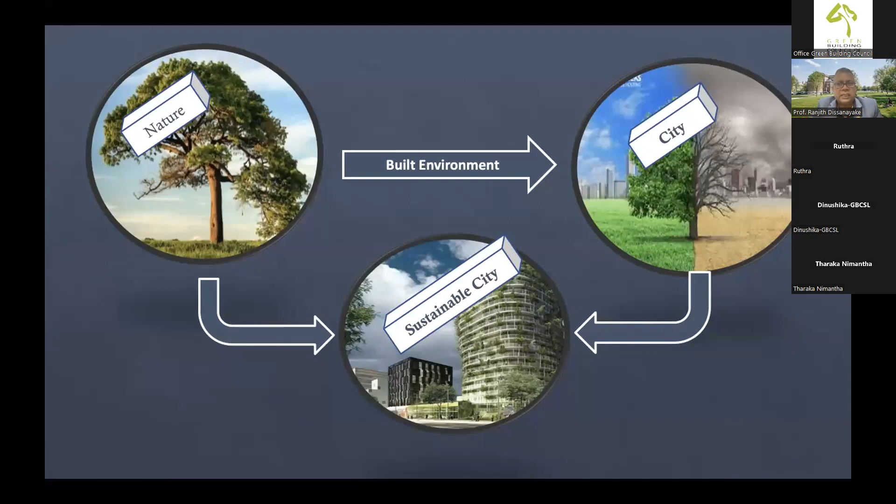Therefore, we build sustainable cities. What we do is again bring back daylight, rainwater harvesting, cross ventilation — I mean, you name everything that we had in nature, we are bringing it back. This is what we are basically trying to do in the Green Building Council of Sri Lanka. So, sustainable built environment: we create the built environment, we understand that we can't survive in the built environment as it is, so we are trying to bring the sustainable built environment.

Similarly, when you go to the economy, we again understand we have a big pressure in the economy. This is another pillar. So therefore, without having a sustainable economy, you can't survive.

We also have many things to get from nature, like renewable energy, clean water, clean air, and so forth. We can learn many things from nature in order to have a sustainable economy.

So now we have talked about the environment and economy. Next is society. People are not happy, they have a lot of issues. You might see on the street, people are not happy because they have so many issues. We have to make sure that we bring happiness to the society. So if you make sure that environment, economy, as well as social - when you bring these three pillars together, only then can you get total sustainability.

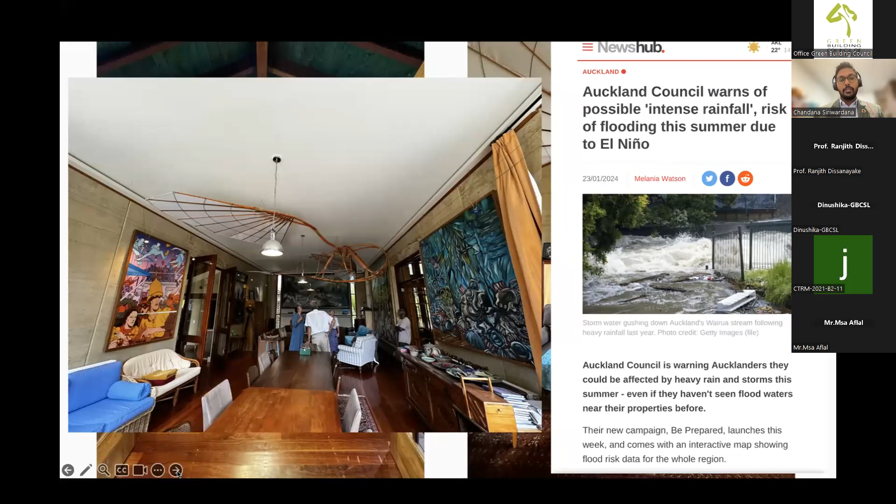Therefore, they are going to do many proactive measures, and develop interactive maps showing flood risk data for the whole region. So they are taking action, but the point is the weather is predominantly changing, and that is going to affect this very nice architectural and environmentally friendly sustainable building. Which makes me worried about that gentleman who is spending a lot of time developing this building.

Another thing is that you all probably know that last year was the recorded highest ever temperature recorded during the summer in Europe. And also these days, if you have friends over in Canada, you've probably seen a lot of cold weather and colder periods, and that is also extreme. So we see the two extremes, right? Back in the days when we were worried about COVID, we thought okay, COVID is the main issue we are having, and then we thought when we can overcome this, because we lived happily before COVID.

We never thought there would be a recession so soon after COVID. Not only in Sri Lanka, people might think recession is only happening here, but it's not. Around the world there are economic downturns happening, and it is real. Back in the day we thought climate change wasn't going to happen, but now we're not giving much attention to it, and it's going to be very real very soon.

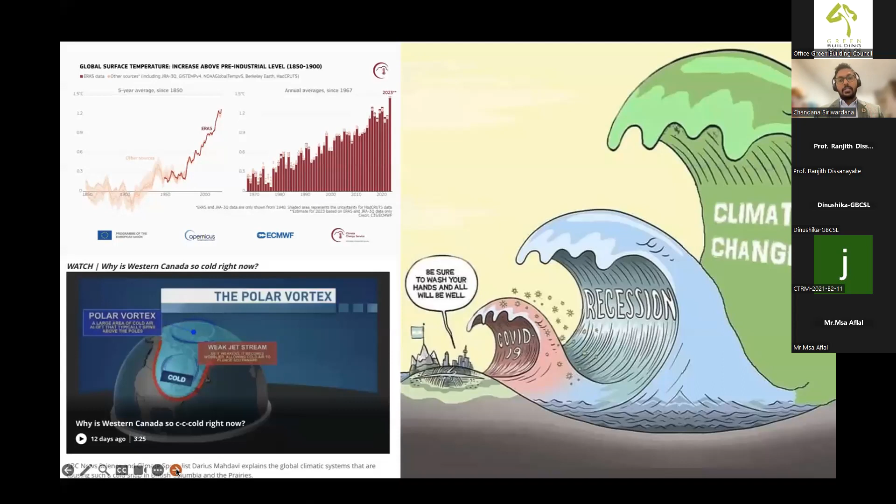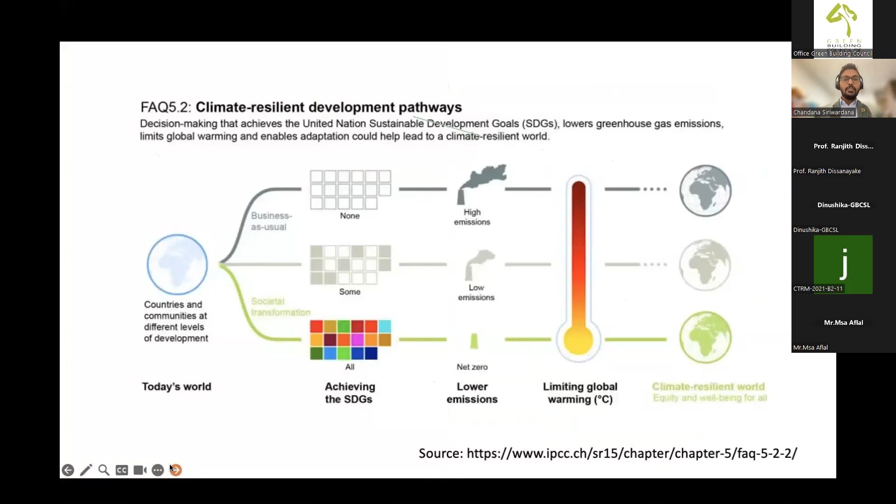Now, as you can understand, on one hand we have sustainable development as a target, and on the other hand we need to achieve disaster resilience, resilience to disaster as well as sustainable development. The triple bottom line of sustainable development was introduced by Professor Ranjith, and I'm not going to explain it further because he explained it very well. Disaster resilience, we'll look into more deeply down in the presentation.

Mainly, the three things we want to focus on in developing disaster resilience are: we want to reduce the chances of shocks. Shocks are sudden impacts which can happen naturally or be man-made. Then we want to absorb the shocks if they occur, and recover quickly after a shock.

In fact, some people get confused about the relationship between sustainable development and disaster resilience. In the literature—if someone is moving the cursor, could you please stop that?

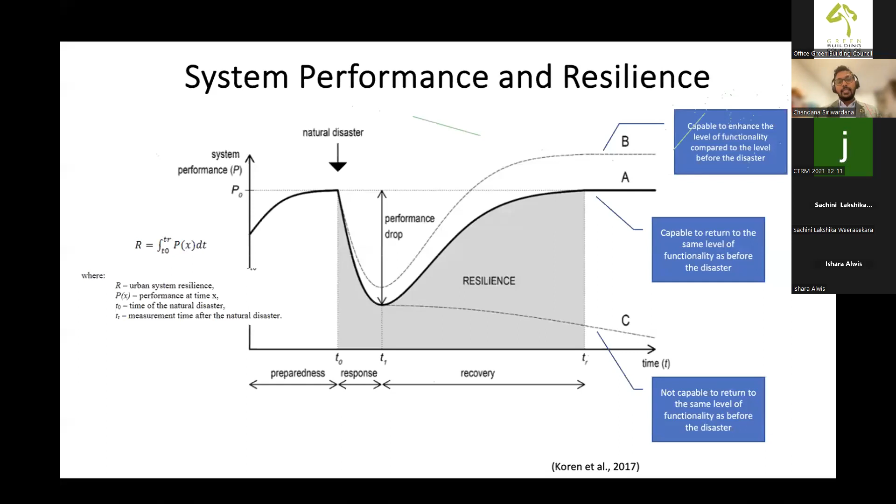So whenever there is another undesirable natural event which makes the performance drop, it will again come back, or it will not make the same amount of drop as the next time.

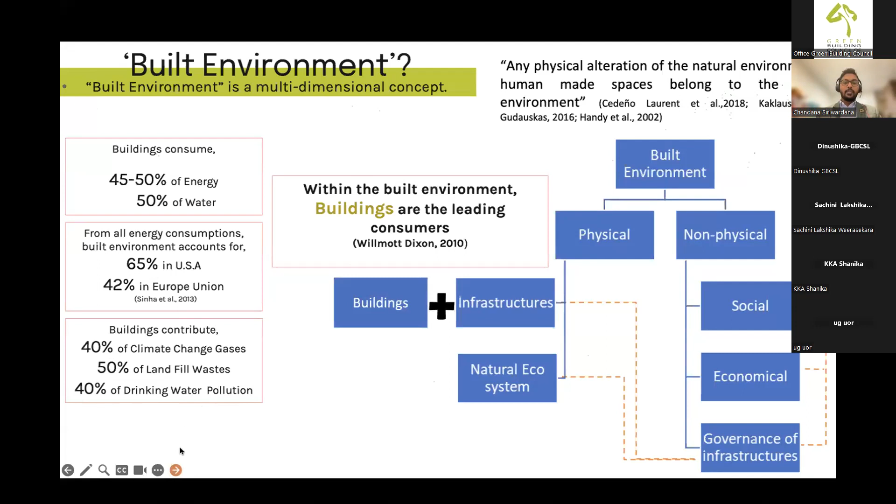Now connecting that to sustainable development goals, we all know sustainable means meeting our needs without compromising the ability of future generations to meet their own needs. If we build a building today, we make decisions mostly for today's context, but the consequences of that building will have to be faced by future generations. The building is going to last for around 50 to 70 years.

So this building is a livable addition to the built environment. So then we have to be very careful about the decisions we are making, as mentioned in resilient sustainable development, if you want to achieve that. In the sustainable development goals, in the built environment context, 9 and 11 are most important. 9 is about industry, innovation, and infrastructure. 11 is sustainable cities and communities.

As mentioned previously, green buildings is a very important concept and movement where green buildings try to overcome these adverse issues. Communities have fundamentally changed their environment and adapted towards sustainability by creating healthy, most importantly healthy, productive spaces. The people living inside have to be productive and energy conscious. This building has to be energy conscious and capable of reducing significant adverse impacts to the global environment and human lives. That is where green buildings are going to be a great solution, and definitely it is not only in Sri Lanka, but throughout the world.

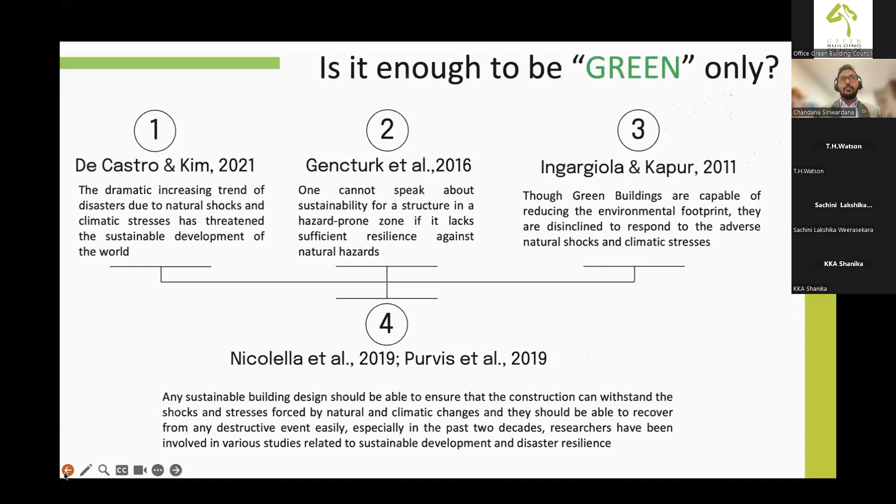It says green buildings are capable of reducing environmental footprint, are disinclined to respond to adverse natural shocks and climate stresses. Now, all these researchers are highlighting the missing link, the importance of linking disaster resilience to green buildings, because in green buildings the focus is mainly on sustainable aspects. Of course, there are some resilient measures, but I will come to that later.

In green building rating tools, to ensure minimum construction standards and practices in sustainable development, green building rating tools provide major guidelines and specifications. GBRTs are instrumental in educating users, incorporating sustainable strategies into planning, design, and construction. However, there is a considerable gap in the potential of existing green building rating tools to incorporate hazard resistance and mitigation into the broader context of sustainable development.

For example, even frameworks like LEED or BREEAM - LEED is US based and BREEAM is UK based rating tools - are not including hazard resilience indicators, as some researchers have highlighted. Therefore, it is essential to integrate certain resilient indicators to a certain level into green building rating tools.

Now there is a problem when you try to integrate these two, because when you try to make a structure - I think Professor Priyan and Professor Ranjit are experts in these areas, so I will let them talk about this in detail - but I will touch on the surface of this.

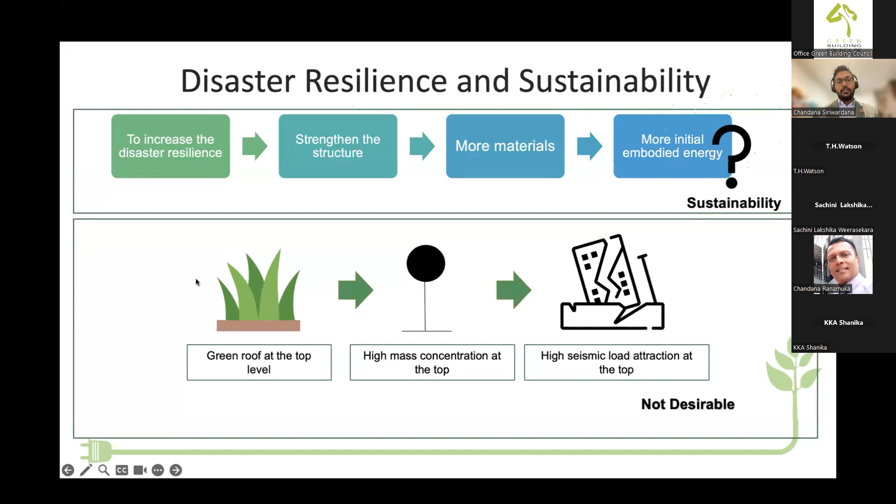So then there are contradictions when we try to merge these two concepts. Now, for example, if I take some examples from the literature, the importance of sustainability and hazard resistance. The other complexity of this issue is that we have many hazards, not only one: fire, earthquake, wind, flood, landslide, right?

So depending on the context, depending on the local hazard landscape, the measures that we have to take are different. So then the designs that we do to the buildings - we want to make them sustainable, and if we are trying to make them disaster resilient as well, sometimes they might not support each other. Now, for example, let's take lighting system, site...

For example, structural durability can be good for sustainability, but it might not be desirable for fire.

So the HVAC systems - sometimes it can be desirable for sustainability, but it might not be desirable for seismic or wind or floods, right? So then different design considerations are good for sustainability, but sometimes it might not be good for fire or seismic or other hazard resistance.

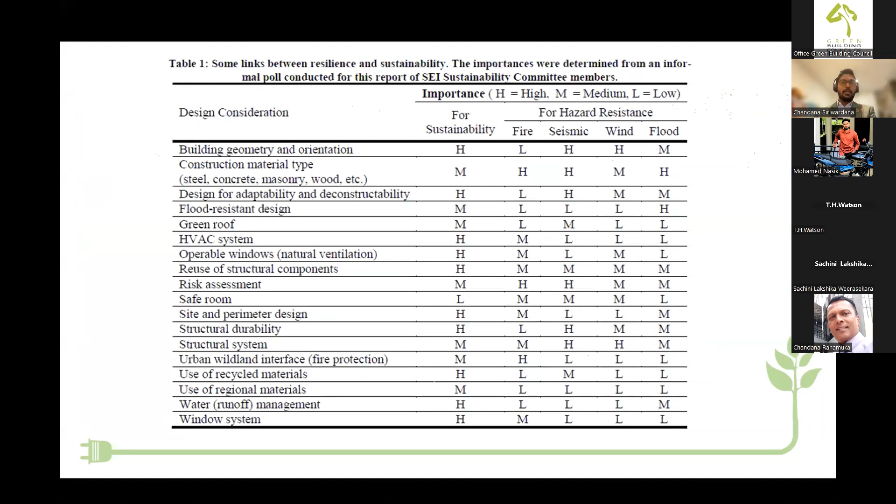I'm not going into details of it, but if you look at where green building ratings are at, it is at the planning stage or the initiation stage. So then what kind of rating tool, what rating range we are targeting, and what are the building codes and regulations - when you are doing the site selection, that is part of what will be assessed from the rating tools.

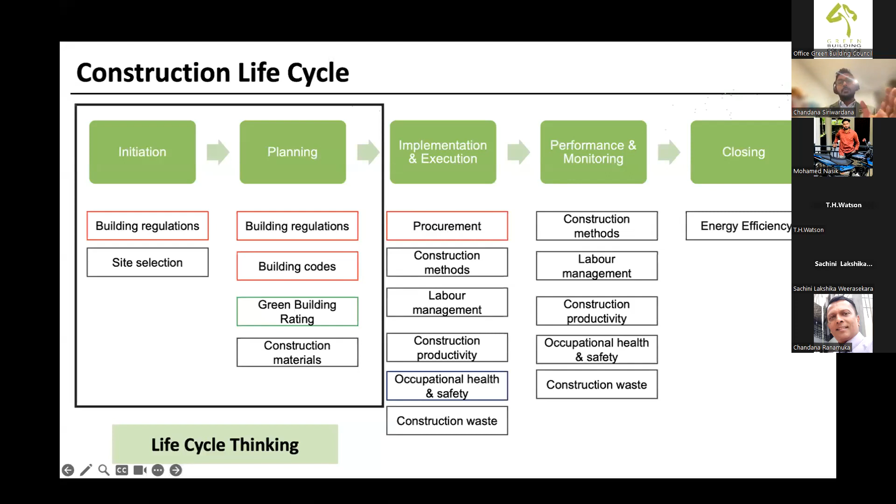So we need to think holistically rather than just go for conventional design practices. Again, I am giving some examples. So not only - as I said, a building is going to last for at least two, three, four decades.

So not only at the initial stages, but at the operational stages, what will happen to this building? What kind of hazards are going to be predominant in this area in the future?

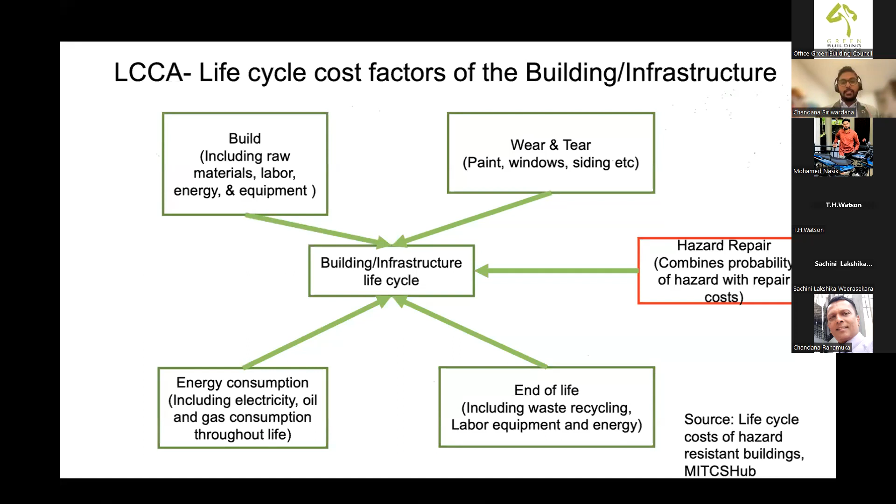What kind of risk is this area going to face? Likewise, what kind of repairs can we do? The most sustainable building is the existing building rather than the new building. So if you are going to demolish one building and develop another, that is not sustainable.

To understand the core elements of disaster resilience, we need to understand the context: whose resilience is being built, what kind of shocks and stresses we are aiming to address, what kind of capacity we want to improve, and what kind of range of responses.

So some resilience indicators that we want to focus on, sometimes these resilience indicators which we want to integrate into our green rating tools or sustainable assessment frameworks might be enhancing the sustainability. For example, checking and increasing the resilience of a brownfield area increases sustainability. But installation of lightning protection can decrease sustainability because you are adding more materials. So we have to be very careful in integrating resilience indicators into rating tools.

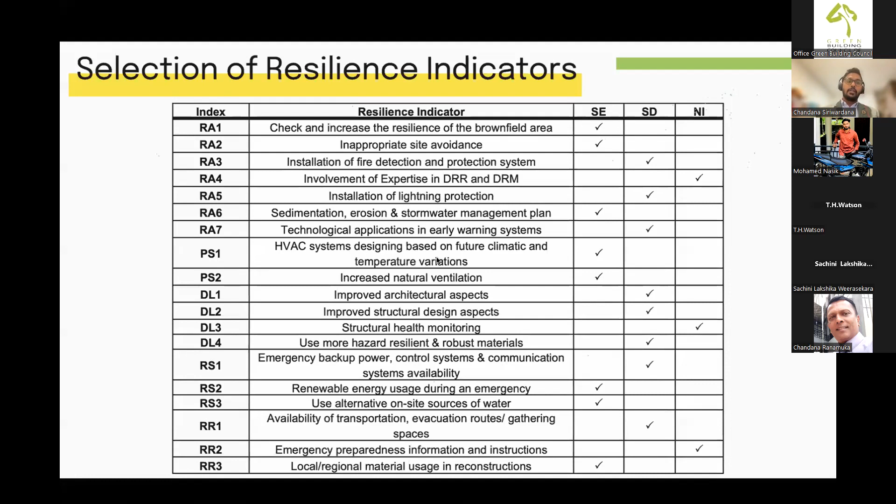Now let me show you quickly a study we did together with Professor Ranjith Dissanayake and some other researchers, which has already been published, on the importance of integrating disaster risk reduction into existing rating tools.

This is the same green rating tool developed by the Green Building Council. We wanted to test if we integrate disaster resilience into this green rating tool, adding several resilience indicators, and call it the new DRR incorporated tool. I don't think it is published and practiced yet, but the great thing is they tried it. It will be published down the road.

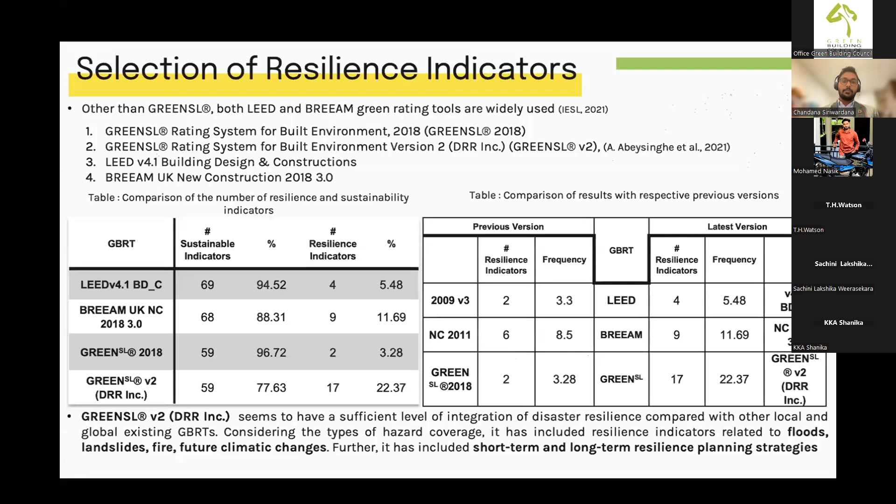In concluding my talk, I would like to highlight that it is very important to integrate disaster resilience into green building assessing frameworks, and it can be done, but it has to be holistic. We need to look at it not in isolation, but with proper support from all stakeholders, and there are other tools - we can keep the green rating tools as they are and develop a separate set of tools for disaster assessment. For example, the RELi framework, a US-based framework purely to assess disaster resilience, or FEMA, again US, to assess the resilience of buildings. Finally, it is very important to systematically approach these issues, looking at the entire life cycle of the building rather than one aspect in isolation. Thank you very much.

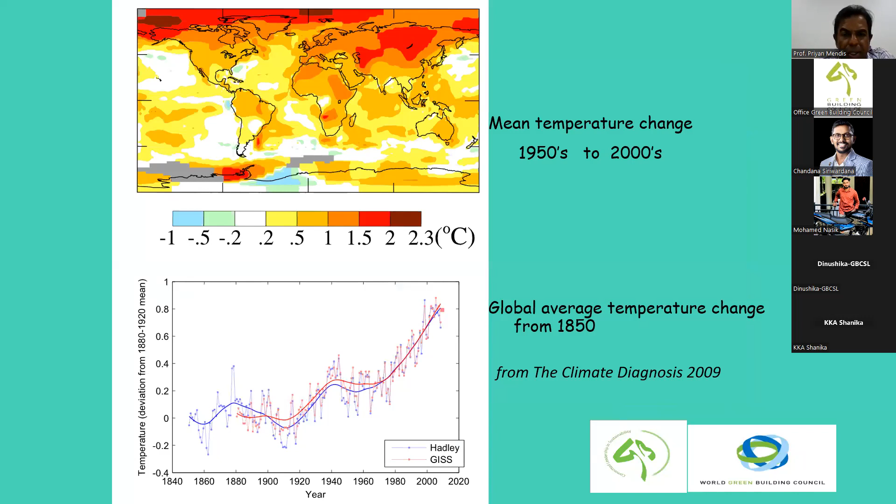This is also very clear: temperatures are rising. I'll go quickly. This is real data from the 1880s showing how temperatures have risen over the years. I'll go directly to the 1940s - when you graph it like that, you can clearly see it is happening. So we have to do something. As Dr. Chandana mentioned, our target is 1.5 degrees by 2050 to limit it, but it's going to be 2 degrees anyway. This is 2022.

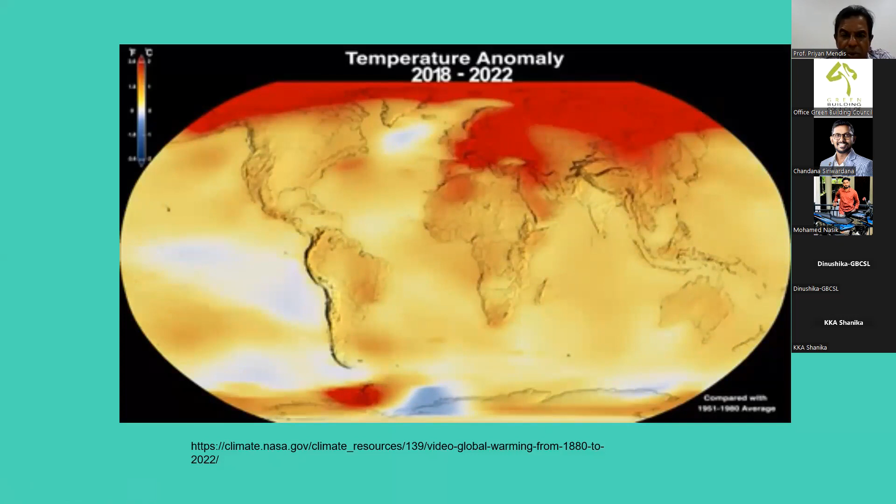It's really happening. As the book I've mentioned before, by Mark Lynas, says, 6 degrees would mean humanity would really be in danger of even vanishing at very high levels. So we have to do something - disasters are going to come. Closer to Sri Lanka, we know droughts have happened in unusual ways.

I was there a few weeks back and it was raining and floods occurred. It's unusual - the climate is changing. Everyone now believes that, with floods and droughts at different, unusual times, and landslips. Disasters are everywhere. So I'll go very quickly and not go through all the slides, as I want at least 10-15 minutes for Q&A.

Sustainability and disaster resilience, as we discussed today, really have to go hand in hand. You can't separate them - that's why these green ratings need the DRR included. As Professor Ranjit and Dr. Chandana explained, why they had to be linked and really included.

Green building is happening everywhere. Every building's architect is considering the green aspects. Twenty years back, if we saw a building like that somewhere in the world, people would think something was wrong with the architect, putting plants and making it ugly. But that's totally different now - everyone likes it and wants to see the green. The world has moved forward a lot.

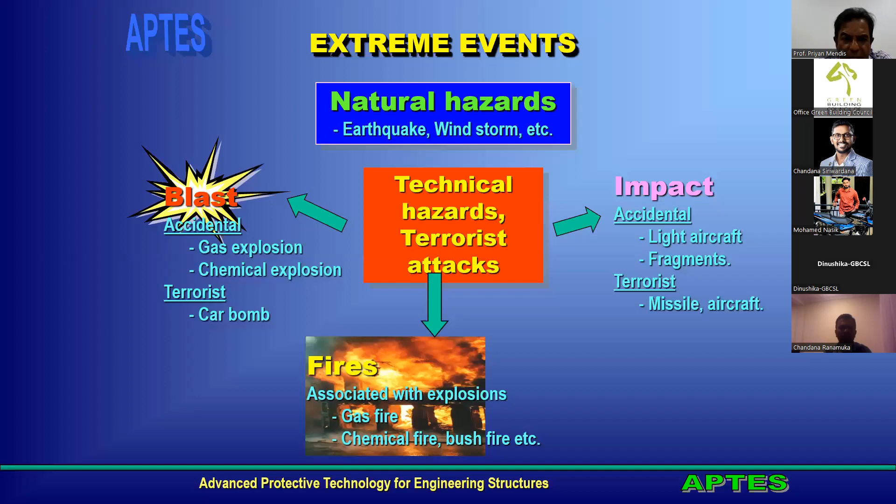So if you start incorporating them when you design a building, you do a risk study, you do a vulnerability assessment - what are really the consequences, what happens if any disaster strikes. Then we have to start coming up with protective solutions, and then optimization - we have to do this optimization.

Today I don't have much time to talk about optimization, but you need to think about reducing materials. We are going for waste materials, sustainable materials in construction, but we need to think about optimizing the elements, bringing in sustainability aspects, and in this case, vulnerability means we need to consider disasters as well in terms of striking a building.

So coming back a little bit, very quick photo details rather than going through everything in detail - fire is the main one which really affects how we can design a green building. What happens if a fire strikes?

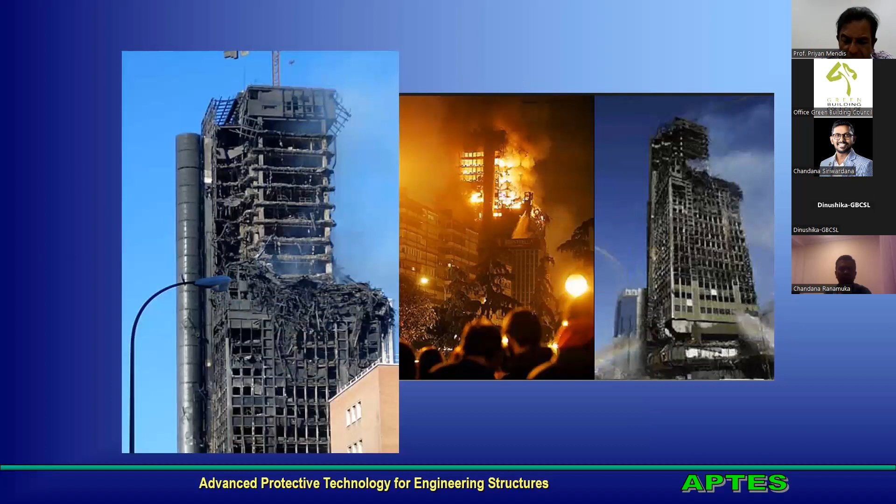Fire is there, then we could have really had to think about. This one here is what you see in the slide is where one of the worst fire disasters started. That is the cladding of the buildings around the world. There's aluminum composite panels - also in between the two aluminum panels there's a polyethylene, PE core.

Why the world went for the PE core and this sort of aluminum composite panels is mainly for energy conservation, because sustainable buildings came. So architects and builders thought, let's look at one which is really aluminum, looks very nice from outside, and has a polyethylene core, which is really for energy conservation within the building.

That led to this disaster. This is a very good example of why we go green, but don't really consider the disasters. So the polyethylene in between the aluminum core just caught fire. You have seen some of my talks in this area - it's a big problem everywhere in the world.

It started with one of the Lacrosse fires in Australia, to the Grenfell Tower fire, which changed the world with these cladding fires. So ACP is a big disaster. Newer buildings will not have that problem, but many old buildings around the world have that problem. In Australia we have retrofitted some buildings, but still around the world there are many.

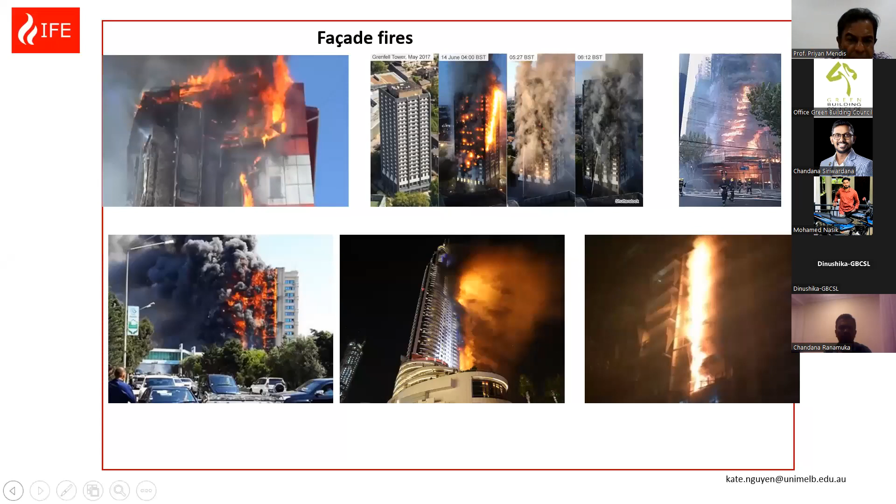Anyway, I'll leave that to another day. So this is how sustainability, if you're not careful with consequences under disasters, could lead to some other very serious consequences, as happened over so many years. Grenfell Tower lost 70-odd lives. So this is why I think including disasters in this thinking is a very good thing.

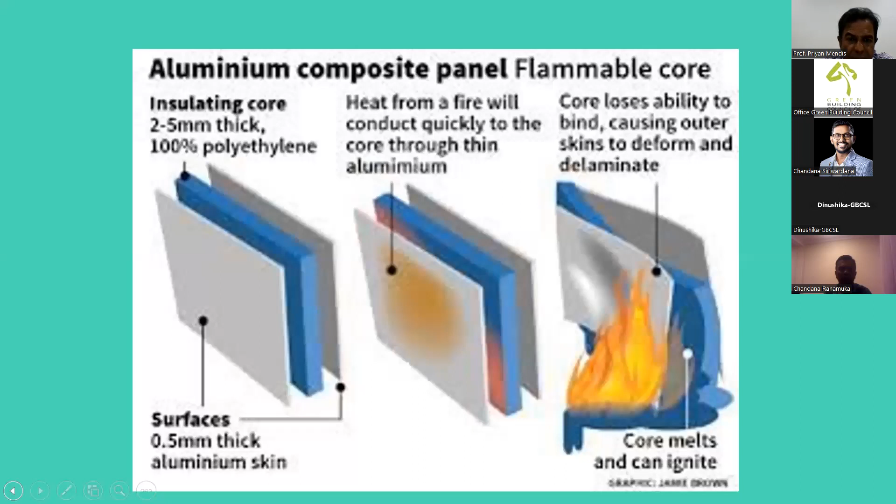Then getting into earthquakes, the Christchurch earthquake, one of the worst around this region, 2011, 180 dead, which changed the standards in New Zealand as well as in Australia. We were looking at it. I will not go into detail, but every detail shows how we can include sustainability aspects.

So rather than demolishing buildings, the future is really about trying to retrofit them. I remember Professor Ranjit and myself gave a talk last year on this topic, and even a recent one in Melbourne that we organized - it's a big one. Rather than demolishing, most of the buildings were demolished in the Christchurch earthquake, but if it happens now, we'll try to keep some of them due to sustainability aspects.

So we need to start bringing sustainability aspects the other way around as well. For sustainability, we need to consider disasters. Same way, when disaster strikes, we need to think about sustainability as well. So it could go both ways.

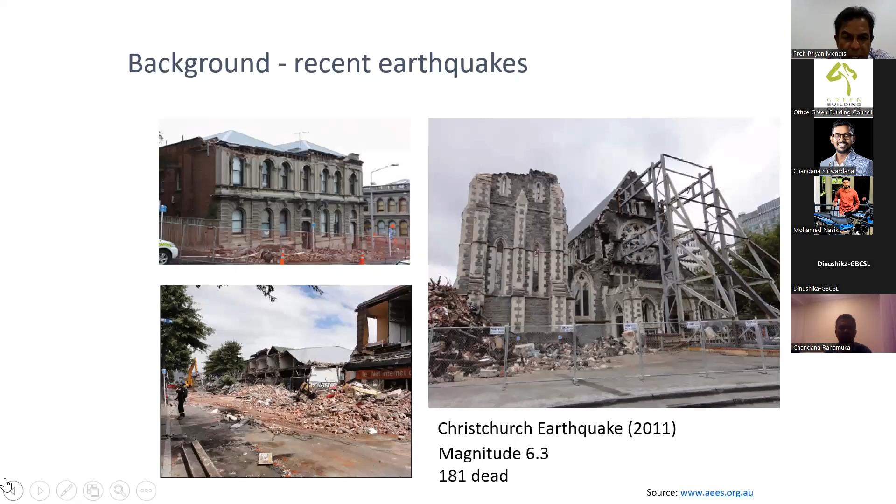So some of the retrofitting was done - I'll leave that to another day. And then when we are designing the structures...

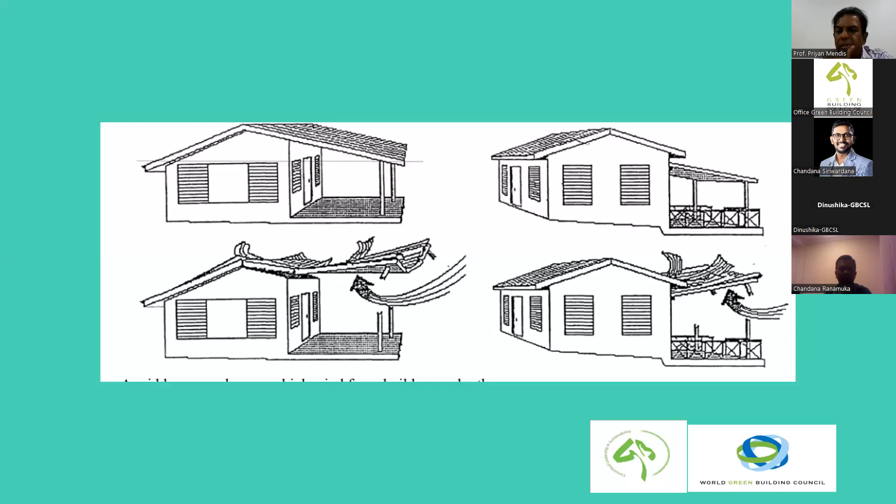Let's say you get a simple house like this. When you're planning this house, we can make it sustainable, but at the same time think about planning aspects where the veranda and all that could be really isolated, put it separated. Otherwise, the whole house is going to get affected in a windstorm or cyclone type situation. So we can start thinking not just about sustainability for the house, but do everything to make it sustainable while also doing some planning to avoid some disasters. They can go hand in hand, as the three of us have explained today.

This is what I have done in one of the concepts, but it has not been built. There were some issues - it was not built, but foundations were done. This was in Dubai, a 1 kilometer tower.

In this case, the concept of wind flow through slots - having the slots - we did the analysis in Melbourne, all this, and introduced the slots to this building. At the planning stage, what I did was put some slots in so that wind can go through. So at the planning stage, we can start doing that.

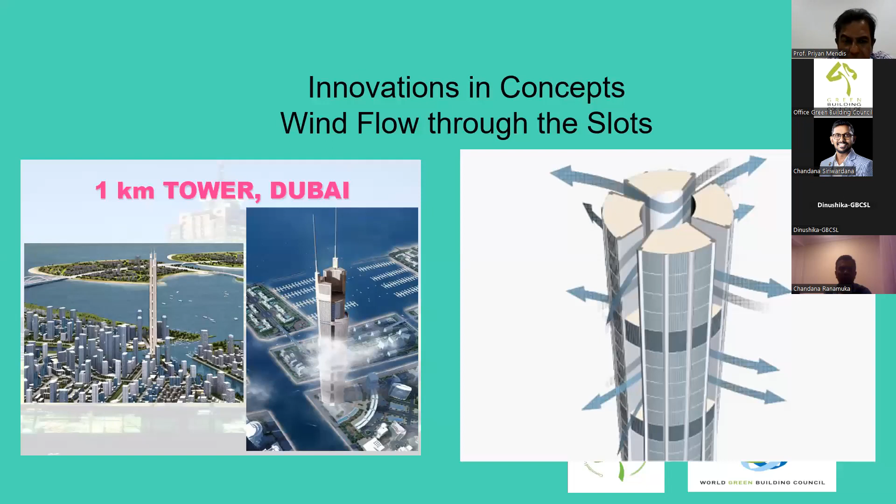So with windstorms and cyclones, we can also optimize the structure, making it sustainable that way. These things will one day, I'm sure, get appreciated. So the blast - we can talk about the blast.

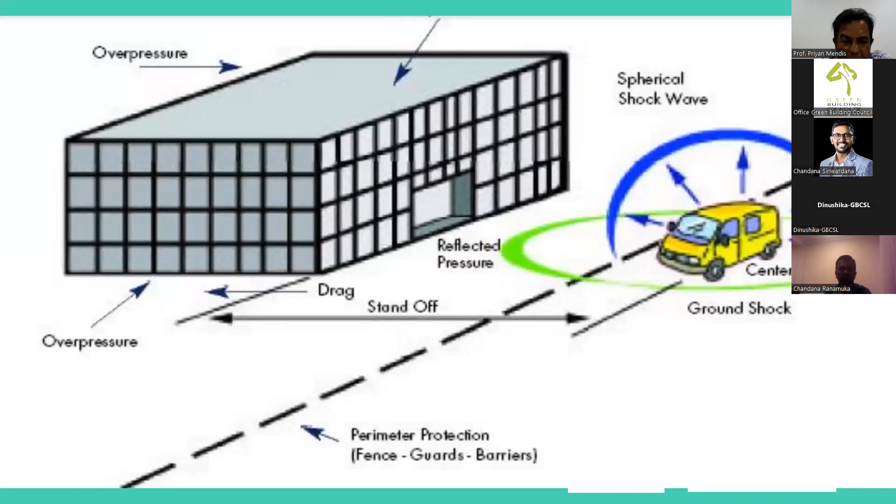We have a blast happening somewhere, and then the windows being incorporated. This has what's called a PVB material core for blast resistance, and at the same time we can get energy conservation too. So there should be recognition for both, because then people can have a sustainable building as well as a resilient building. Even this can be blast resilient because you are doing both, and that can go hand in hand. These are a bit more detailed, I'm happy to answer questions, but the key is to start incorporating both sustainability and disaster considerations, like this blast in this case.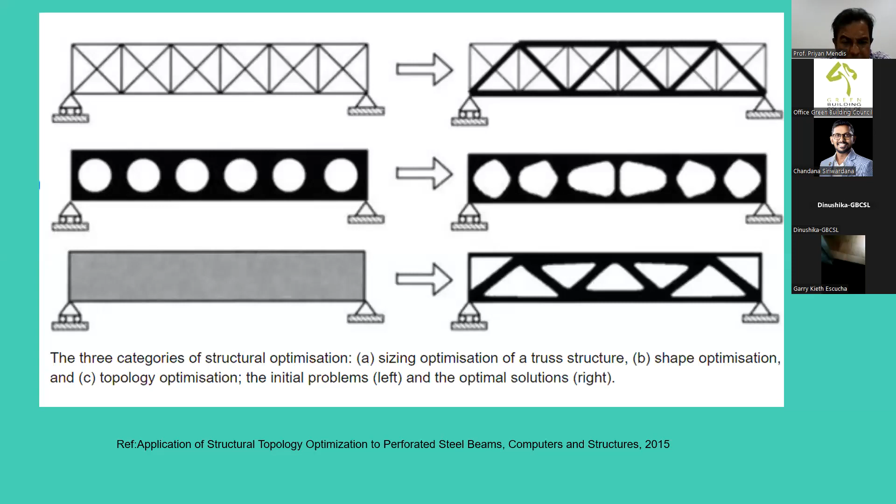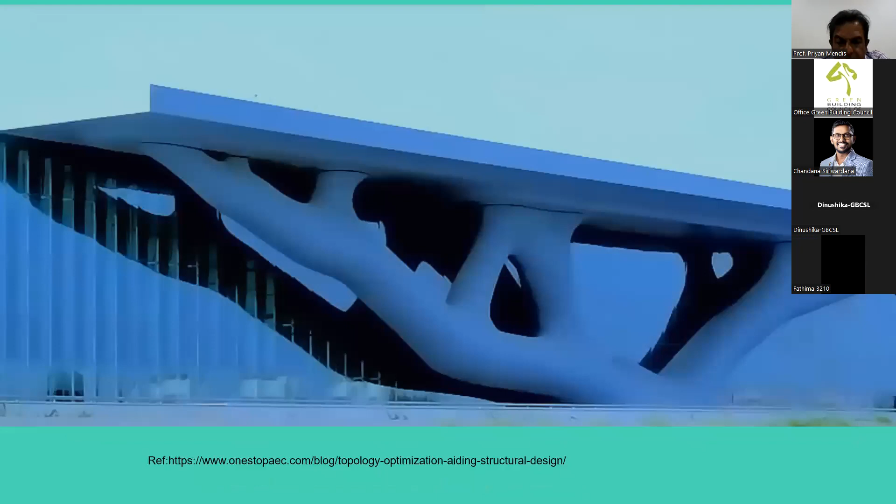Now this type can be designed for any disasters - this is a newer area which will emerge over the next so many years. I think that's the last slide - I know, last two slides. This is one of the structures coming out of BIM systems, Revit and similar tools, which can be used to optimize the structure and reduce materials, while also getting architecturally nice shapes. I know there are architects in the audience who can start working on topology optimization using Revit type tools and others. I think that has to be done in the future rather than just designing ordinary structures - we get aesthetically very nice structures as well.